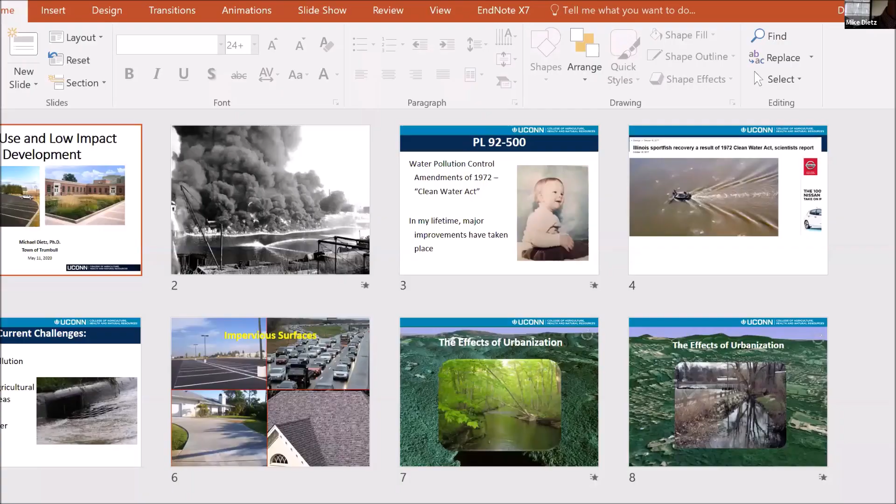So I'm going to go ahead and share my screen then. Does that look okay? Everybody see the first slide? Yes? Okay, all right. So I'm going to start out with a bit of background information.

Forgive me if you already know a lot about stormwater, I just need to make sure everybody's on the same page with a few slides on background stuff. Then I'll go through what low impact development practices are and some of the innovative things available for you guys to use in your town.

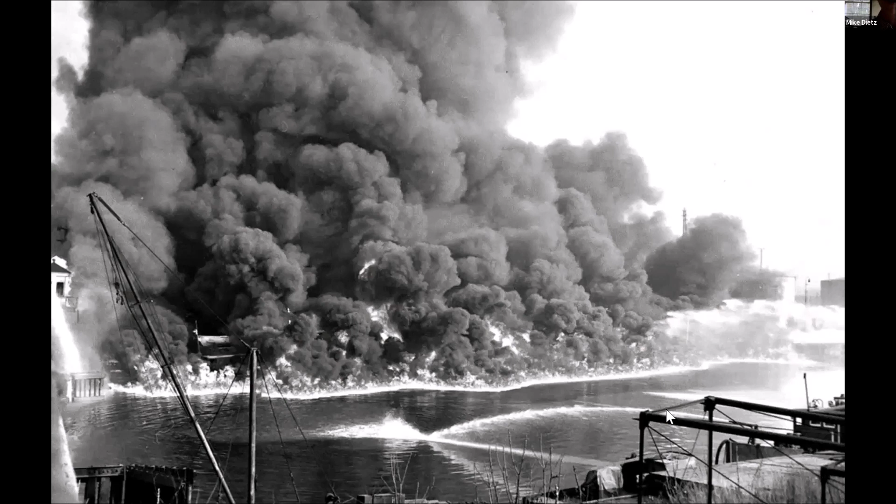And then of course we have one of the many fires that happened on the Cuyahoga River, but the one that captured national attention was this one here. These were events that really catalyzed and coalesced people around the environmental movement and forced our legislators and everyone paying attention to really do something about it.

So what happened as a result of that was PL 92-500. As many of you may be aware, that's also known as the Clean Water Act, but its formal name is the Water Pollution Control Amendments of 1972.

So 1972 happens to be a very good year, that's when I was born. So there I am there, and you can see by looking at me in my little frame here that I obviously had more hair in that picture than I have now. So some bad things have happened over the course of this lifetime.

But as far as water is concerned, major improvements have taken place in our country and certainly in Connecticut as a result of the Clean Water Act. And just as an aside, that act, the Clean Water Act, and the Clean Air Act were proposed and initiated under a Republican administration, but passed with strong bipartisan support because there were so many people, such a grassroots effort, that wanted this. So it's really hard to imagine this bipartisan effort making something positive happen for everyone, but that's really the way it was.

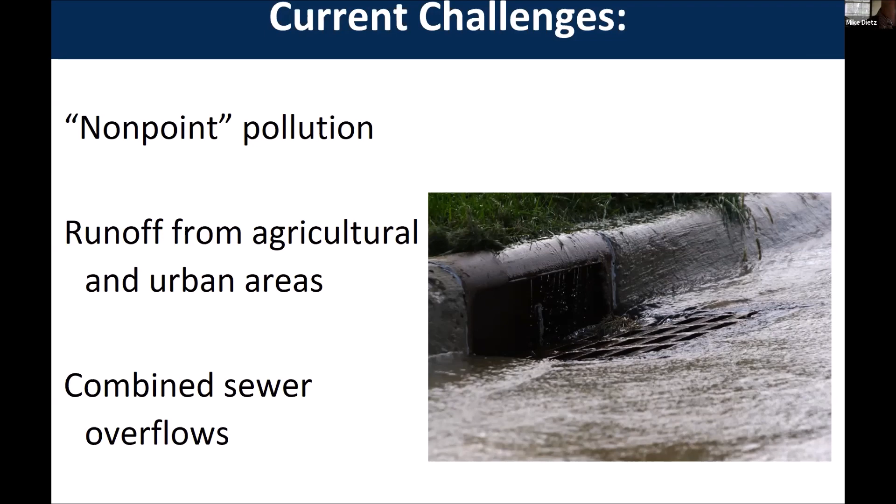What we're dealing with now is what we call non-point pollution, runoff from diffuse sources from agricultural and urban areas. I'm only going to be focusing on the urban stuff tonight, but agricultural runoff is also a form of non-point pollution. Combined sewer overflows also factor into this because there's an input from the stormwater system that causes those overflows. I'm not going to talk too much about those tonight, although I can answer questions about them if anybody has a question on those.

What's really driving these issues we're faced with now with non-point pollution are impervious surfaces—parking lots, roadways, driveways, rooftops, anything water cannot pass through. I'll give you a little progression here.

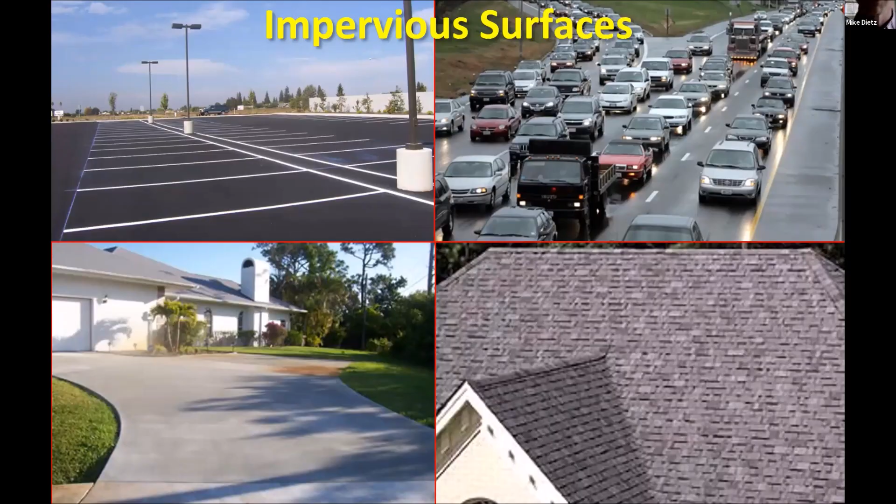This is just a representation of an undeveloped watershed. Not far from Trumbull, if you go up into the hills a bit, you can get into some very pretty areas with no houses, some nice state forest, tracts of undeveloped land. A stream that drains a watershed like that would likely look something like this.

We have lots of good cover over that stream, good forests, trees holding that bank intact, so it really is resilient to flooding. The trees shade that river to keep the temperature lower, so the native species that would be surviving here can still survive. And there's nice pool and riffle structure if you like to go fishing, especially trout fishing—that's nice habitat for trout.

Next we go one tick up the scale of urbanization. So we have some subdivisions, a few roads. A watershed like this might have a river that drains it that looks something like this—a little bit different. We can see this parking lot very close to the banks of the river, and this armoring of the banks, these stones installed here, because we've started to see some changes take place in the hydrology due to all that impervious surface in the watershed.

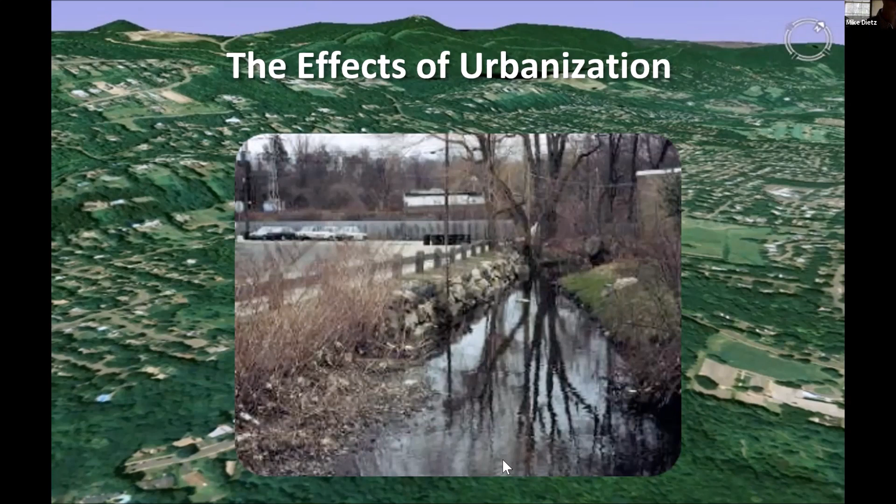We don't have as much cover over that stream keeping it cool in the summer, so it warms up quicker. These are just a few of the things you can see here, and the shape of the stream tends to get more channelized and straightened as well. So a little more developed.

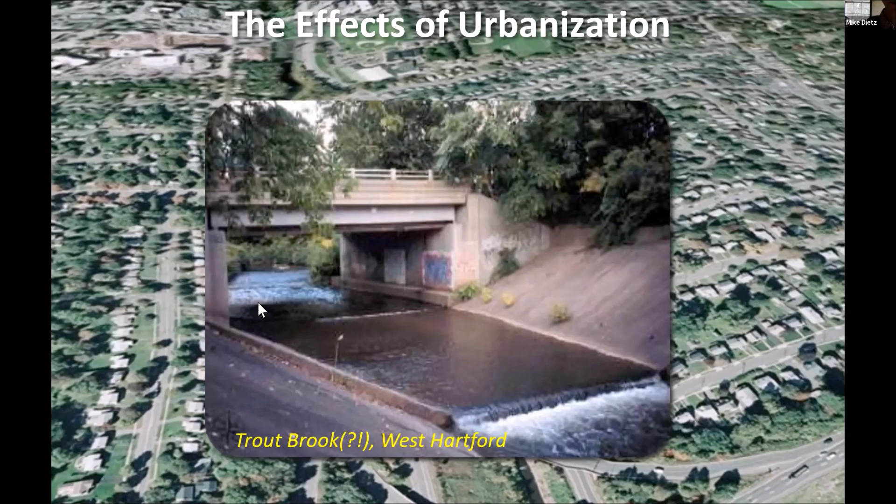This particular one is from West Hartford. If you ever venture up that way and see the exit off Route 84 for Trout Brook Drive, and look at the concrete-lined channel here, if you like to fish for trout, you probably know there aren't going to be too many trout in Trout Brook these days. When we see all this armoring of the channels, you're losing all the habitat for the aquatic life, and it's really not very supportive at all.

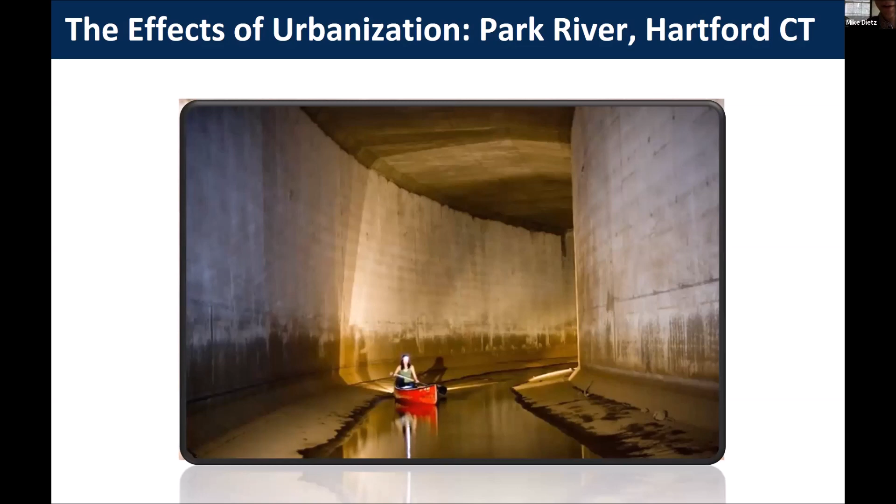That was when the Park River was put underground because of major flooding that happened in the 1950s and earlier that devastated the city. So they channelized the Park River and put it in a conduit underneath the city, and this is what the Park River goes through today. Really no opportunity for aquatic life to survive down in those kinds of conditions, as you would imagine.

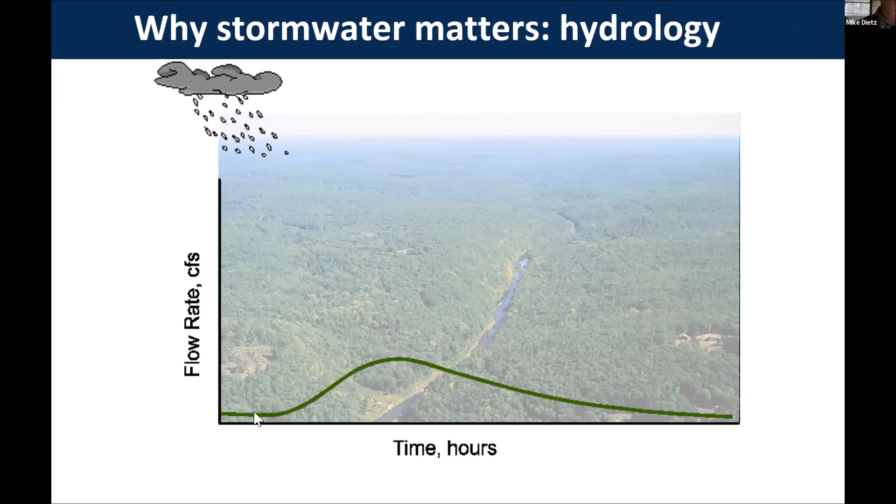So if we have a rainfall event happen on that undeveloped watershed, we might see a response that looks something like this. So we have this base flow level in the stream. You see a gradual climb up, a slow tailing off of that flow rate in that stream. For that very same rainfall event on a watershed that has a lot of development in it, like this one that you're seeing here, we would see a very different response in that stream.

So we would see much more runoff and a higher peak rate of runoff. So there's more volume coming out and it's coming off faster and it's getting there quicker. All right, so the timing of it has shifted too. So major changes to the hydrology, and this also drives changes in the quality of those waters too.

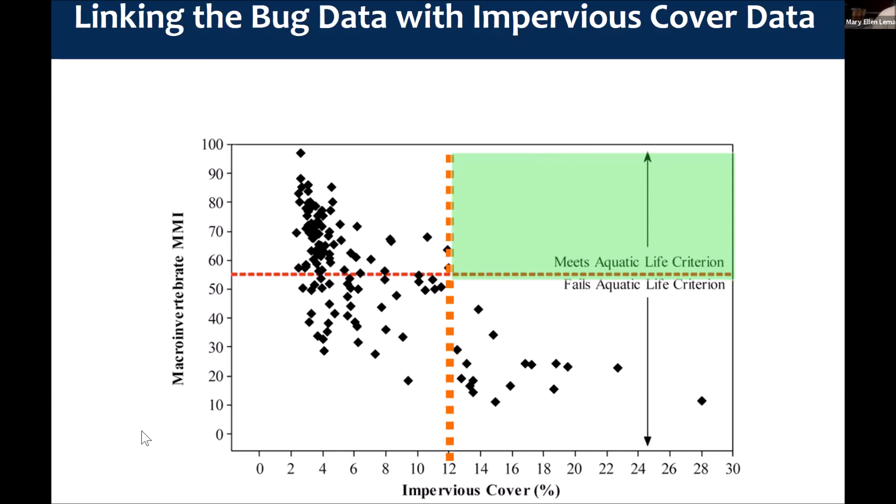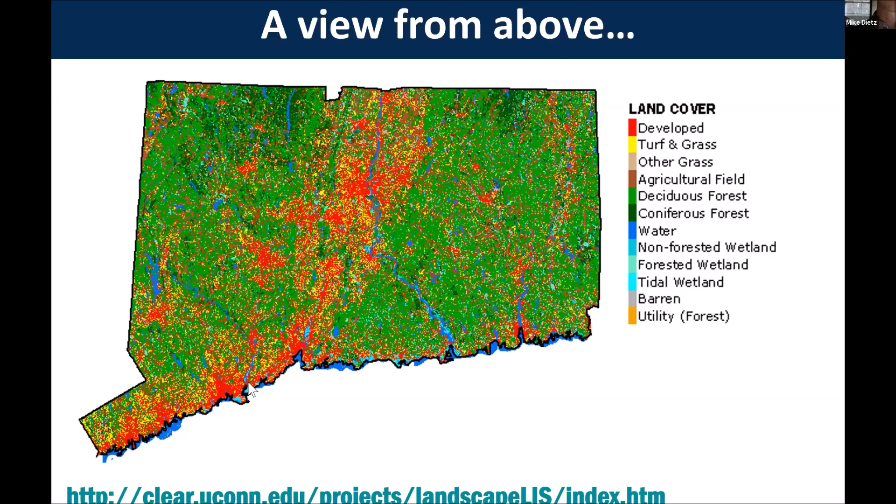But what this represents, the red pixels that you can see here are developed lands. So for each pixel, the software makes a decision as to whether it should be classified as developed or deciduous forest or evergreen forest. The green pixels are the forest classes, as you can see. But you kind of get the idea where our development is in the state. So around the center here, we've got Hartford and East Hartford. Down along the coast, we can see New Haven. Further down southwest, you can see the Bridgeport cluster here, and you guys are obviously just north of that.

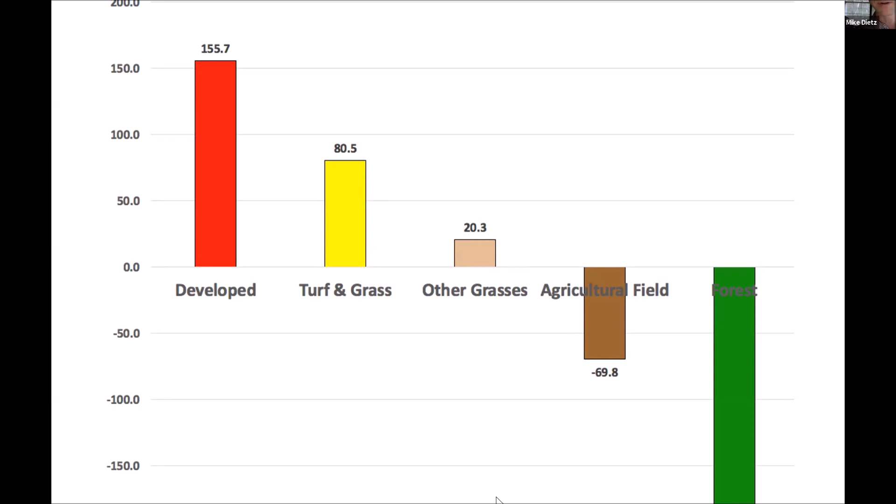So where did it come from? These things have to be at the expense of something else. So we lost agricultural fields, about 70 square miles, and 180 square miles of forest, the green one here. So you can see how this shook out over a 30-year period across the state. Pretty scary. If we compress all that development into one corner of the state, it would fill up Litchfield County, and turf and grass would fill up Middlesex County. So quite a large area when you look at it across the state.

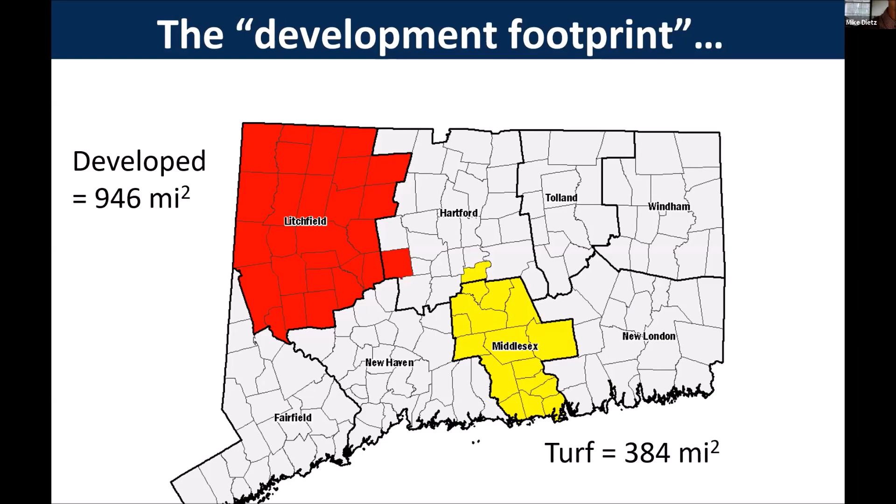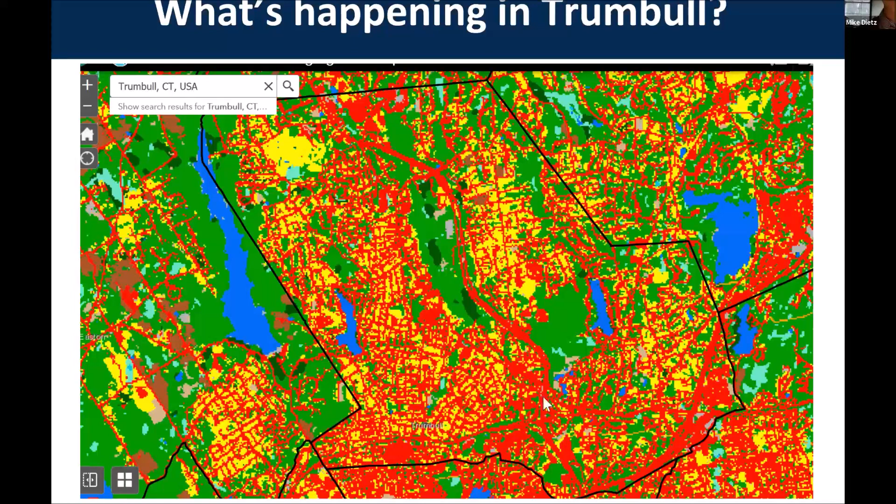So this is what's called Connecticut's Changing Landscape. So you can zoom in on your town and click on it and get some information about it. So this is just that image of 2015 of your town. So you can see some forest pixels here, the greens, but you guys have a fair amount of developed areas and turf and grass in there. Okay, so that's just a visual representation of it.

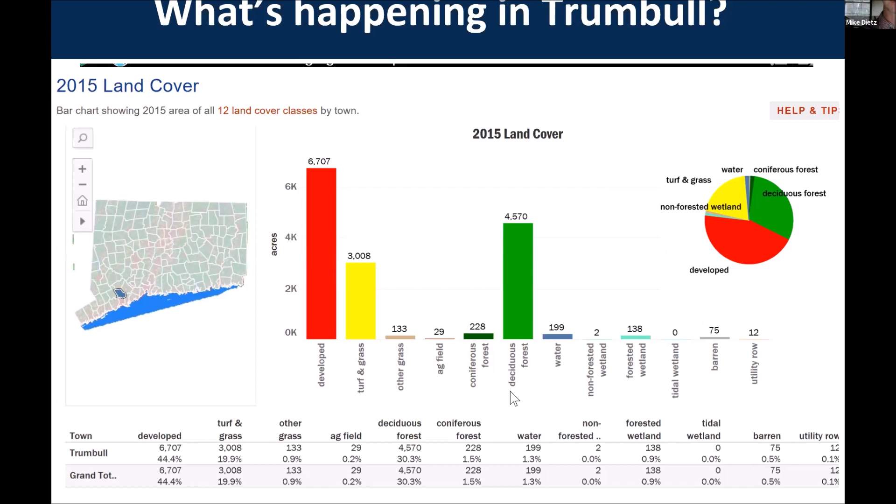All right, so 44% impervious or developed land is a really high percent. As far as averages across the state, that's one of the more developed towns that we see. And then if you look at what changed in the town from 85 to 2015, here's how it shook out for you all. So the numbers are small. Again, I'm not going to force you to look at those numbers in the table down there. I just put that for your reference.

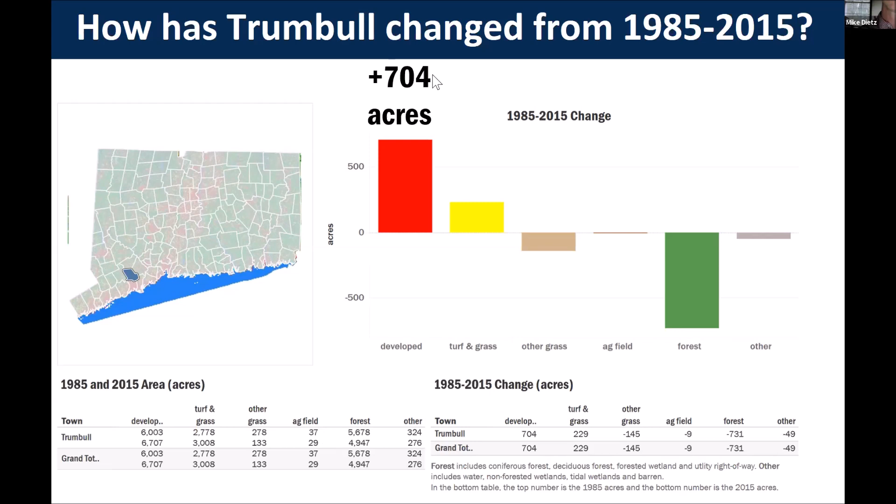But what happened here, you added 704 acres of developed land. You added 229 acres of turf and grass. And you lost 145 acres of other grass. And you lost 731 acres of forest land. All right, so you can kind of see how it all adds up and subtracts out over the course of time. So that's a decent amount of impervious land, developed land, added in a 30-year period. So maybe I'll just pause there for a second and see if anybody has any questions about that before I move on.

Is that surprising? I'm sure that just like other parts of the state, the past few years since the recession, we didn't see a ton of growth. So I would say since 2012 or 15, we probably haven't had a huge growth spurt in the state like we have in some parts of our past. But we all are well aware of the building booms that happened in the 1980s and 90s around here. Good. So if there are no questions.

I have a question. Yeah, sure. Go ahead, Marshall. Okay. We are a fully developed town. There's virtually no undeveloped land. We're at a tear down and rebuild stage. Gotcha. And I know as I've sat through zoning hearings and things, we're looking for changes so that what's being done will take the groundwater, not have runoff, to take care of those changes. So looking at really what happened until 2008, where we reached fully developed, I don't get as nervous because we don't have the acreage to lose anymore.

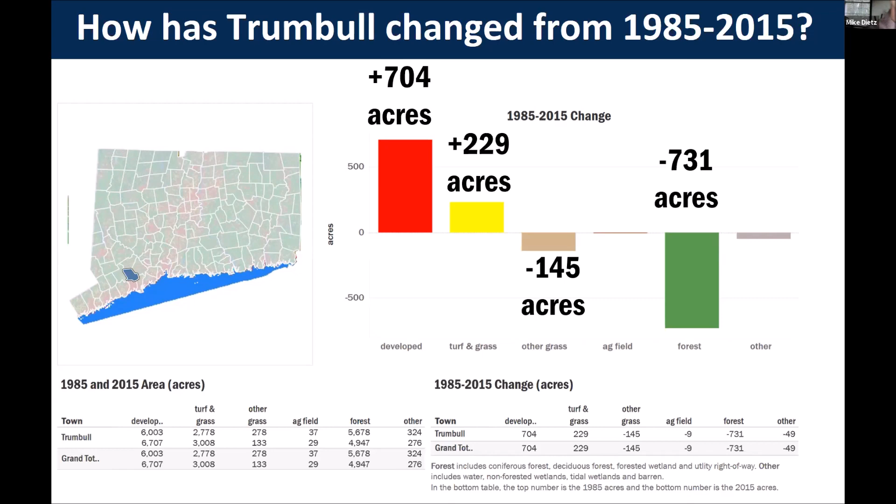All right. So this is just the last little piece here about really the magnitude of this issue. So I come from a blue collar family. My uncle is still in the construction business. So as you can imagine, with me as a water guy talking about this stuff, sitting around our holiday dinner tables, the conversations can get quite lively. So my uncle always tells me, what are you worried about? It's not that big of a deal. It's just rainwater. Why do you make such a big deal out of it?

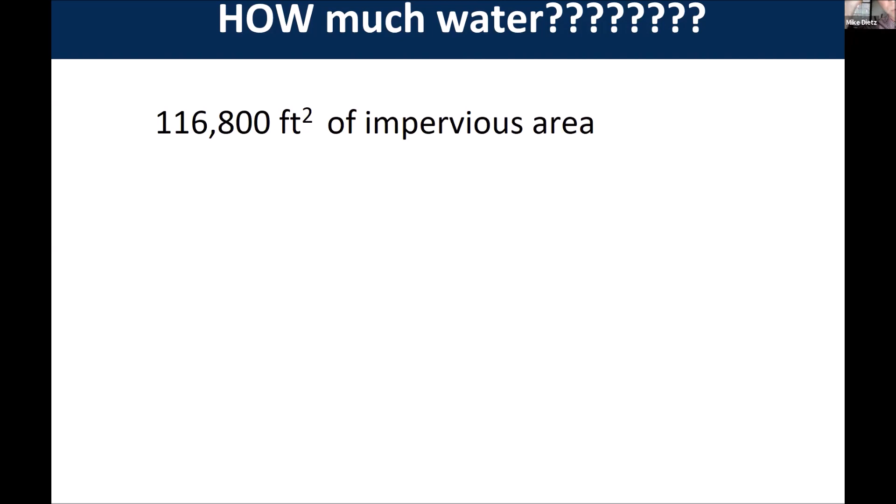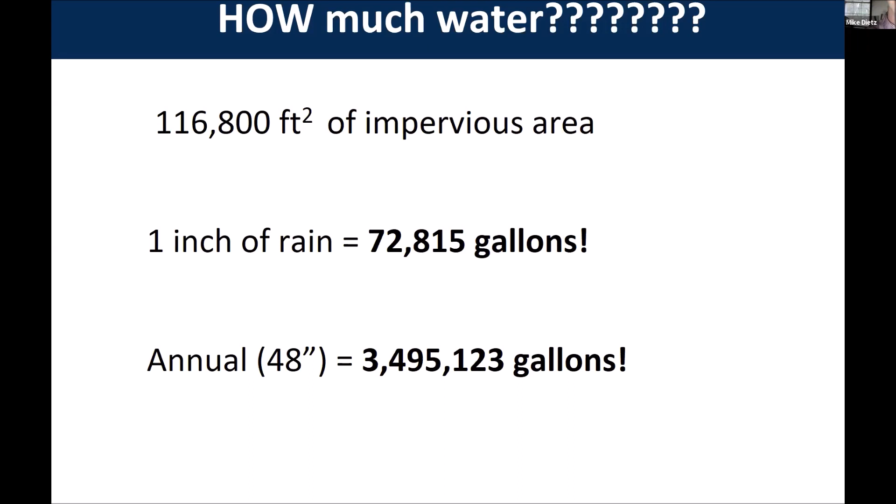If we get an inch of rain, 72,000 gallons of water are gonna run off that site. 1 inch of rain. You think about how often we get an inch of rain. It's pretty common around here, right? That's an unbelievable amount of water that has to come off that site, and it has to go somewhere. In an average year, we get about 48 inches of rain, 3.5 million gallons off of 2 small buildings and a parking lot.

So now I know, as you said, you are a developed town, but go to Bridgeport, go to New York City and multiply those numbers that I just gave you from that one tiny little site. And you'll see just for a simple 1-inch rainstorm, the billions and billions of gallons of water that have to run off and go somewhere. Now you can understand the magnitude of that problem. So it really is a big deal when you add it all together.

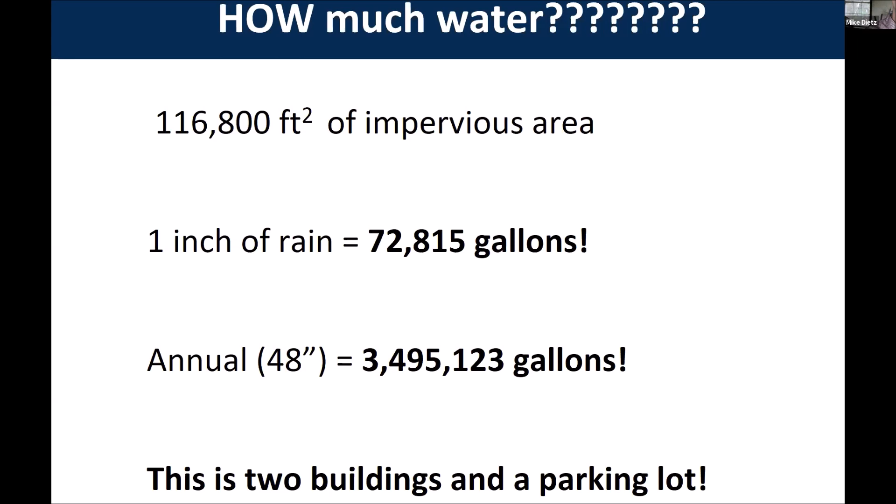So now we'll go into what we can do about it. I'll talk about low impact development and site planning here. This is also called green stormwater infrastructure, but the term low impact development or LID started in the 1990s from the state of Maryland. They were dealing with issues with the Chesapeake Bay. So all of the goals of low impact development really center around that hydrology that I've talked to you about, trying to preserve the hydrology of that site before it was developed. That's the bottom line here. All right, so all those things that go into that are what we're trying to focus on.

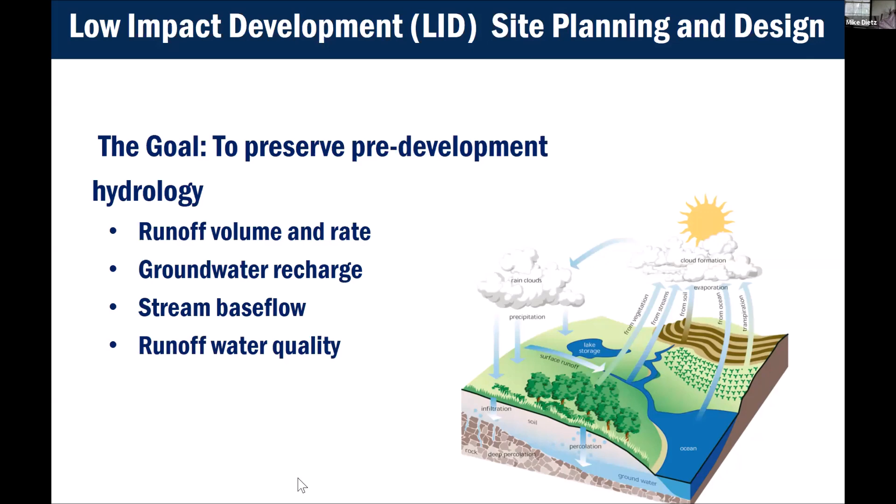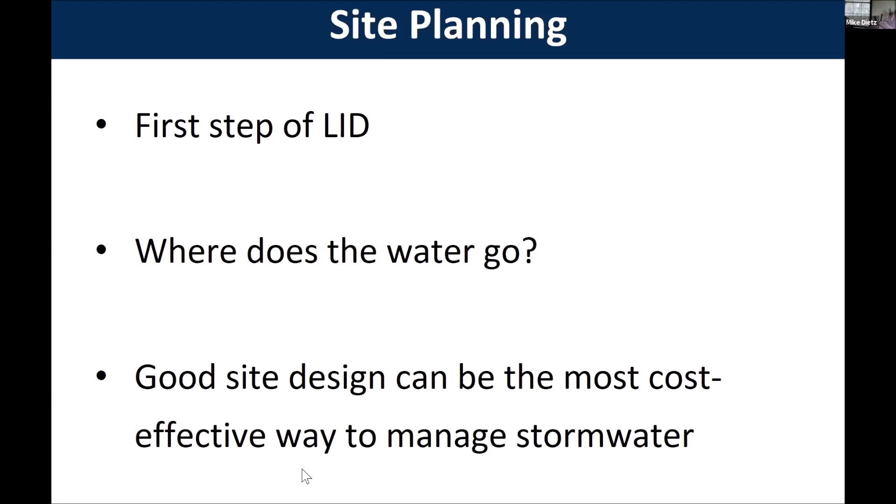The planning of that site before any development even occurs, and again, I understand you guys aren't in this phase right now, but even with a redevelopment, proper site planning can really go a long way. So just asking, where's the water currently going? Is there a way we can take advantage of the natural system, natural movements of the water that are taking place? Instead of having high cost things to put in, can we design it in such a way that it manages water on site?

So this is just one very small example from my colleague's driveway. He has a house in Glastonbury. He needed to repave his driveway. He wanted to put in some pervious pavers, which I'll tell you about in a few minutes. But when we looked at his driveway, we realized that it wasn't draining to the road. It was actually graded off to the side, and the runoff went into the woods. So this driveway was not connected into that stormwater system, and therefore was not really causing problems downstream. He was managing it all right on his lot.

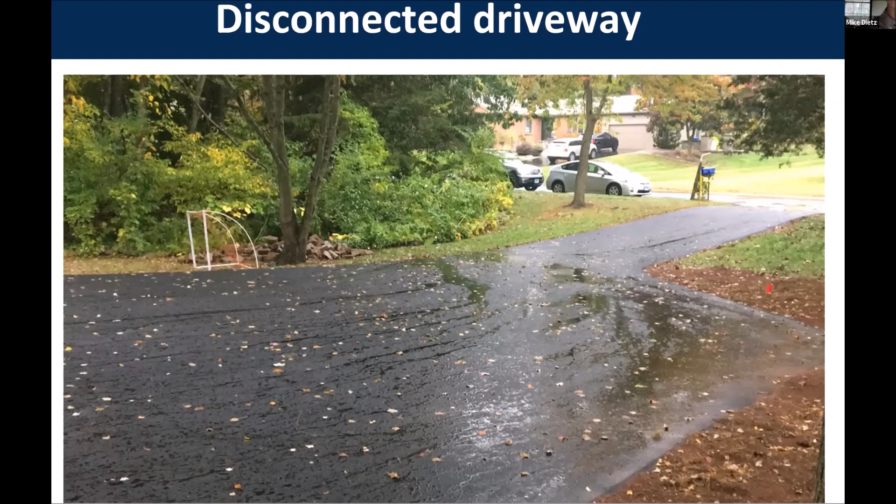So this site design, and again, every site is different, but sometimes you do have the ability to make a small change in where water is directed, and that can save a lot of money in the long run. So the practices that we'll go through here: bioretention or rain gardens, pervious pavements, green roofs, and rainwater harvesting.

The gutter downspouts come down the side of the house. They're angled through the foundation and they go into the sewer line inside of the house. So the roof of that entire building is fed directly into the sewer system and is part of that combined sewer problem that we have in Hartford and many of our other big cities. So a very simple disconnection of that pipe and directing that water out into the front yard made a tangible difference here at this house. And no, this didn't solve Hartford's water quality problems, one house, but you add all those houses together and look at the potential disconnects that you could do, and then it really starts to add up.

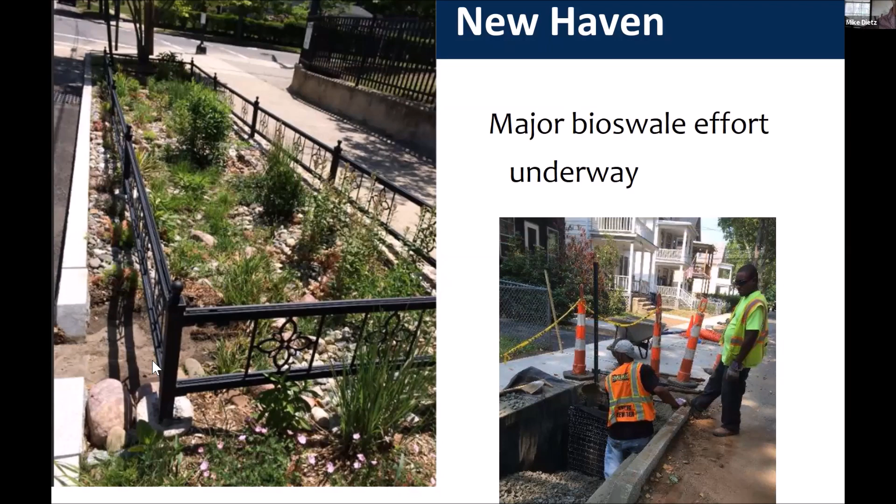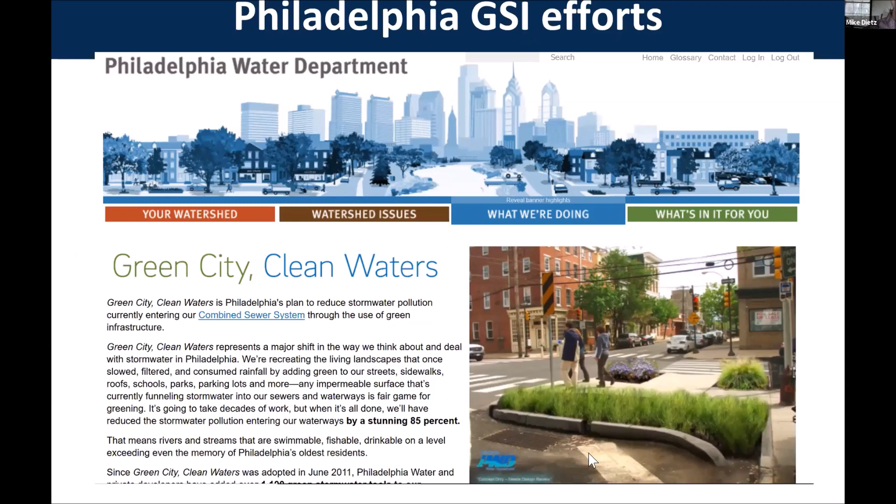Here's another example of Philadelphia, another heavily developed city. They have major issues with combined sewer overflows. They have a big effort underway to handle stormwater, to keep as much of that stormwater as possible out of the system to avoid that problem in the first place.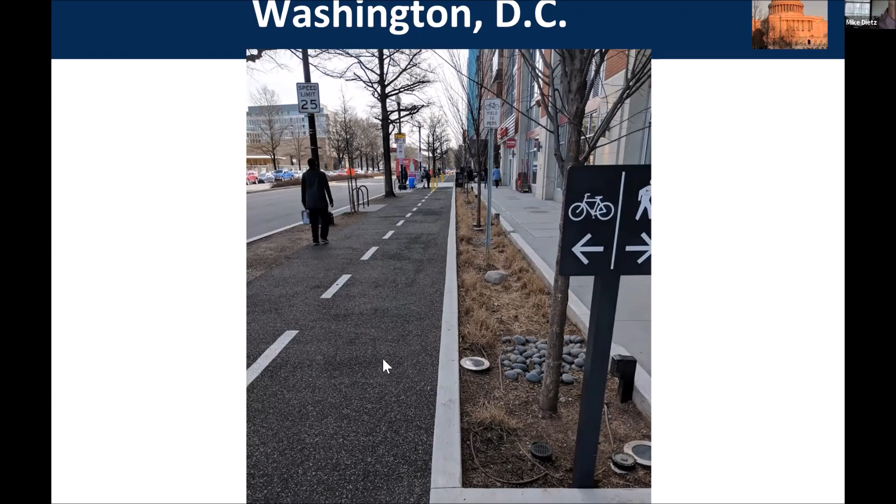Maybe I didn't explain this well enough when I first introduced rain gardens, but the goal here is to get that water into the ground, very close to where it's generated. So taking water either off the roof of the building or off of the sidewalk or even off of the road, as you saw in New Haven, getting it down into the ground as it did before that site was developed. That's the key.

The plants that go into these, I'm not going to go into detail on them, but we have a list for Connecticut that we've put together. We also have lists for other states. We've expanded this; I'll talk more about that in a minute. These are plants that can tolerate wet conditions sometimes, but can also tolerate dry conditions at other times, ones that are native to this area around the outskirts of wetlands.

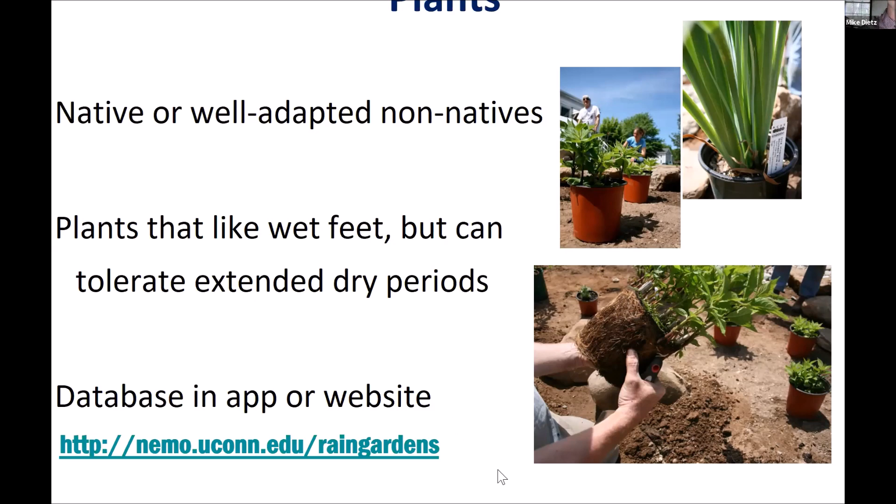And I'm a very practical, hands-on guy. I'm not going to try to tell you that all these things are a silver bullet. You just put these in and they fix all your problems and pay your kids' college tuition and everything else. This is reality, and everything needs to be maintained. It's just different maintenance.

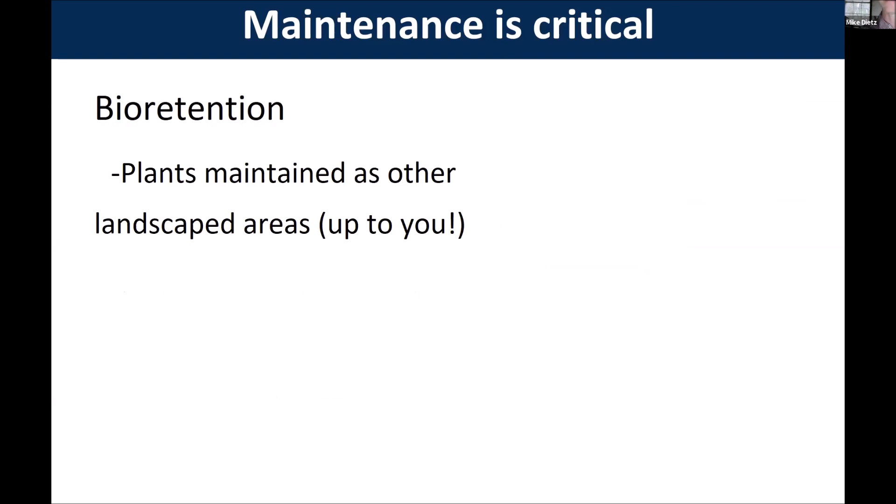So for bioretention, the plants can be maintained as other landscaped areas. It's really up to you how you do that. You need to watch for erosion, just to make sure that it's not cutting out any soil anywhere. But the most important thing is to make sure that water can still get into it and it has the storage that it was designed to hold, all right?

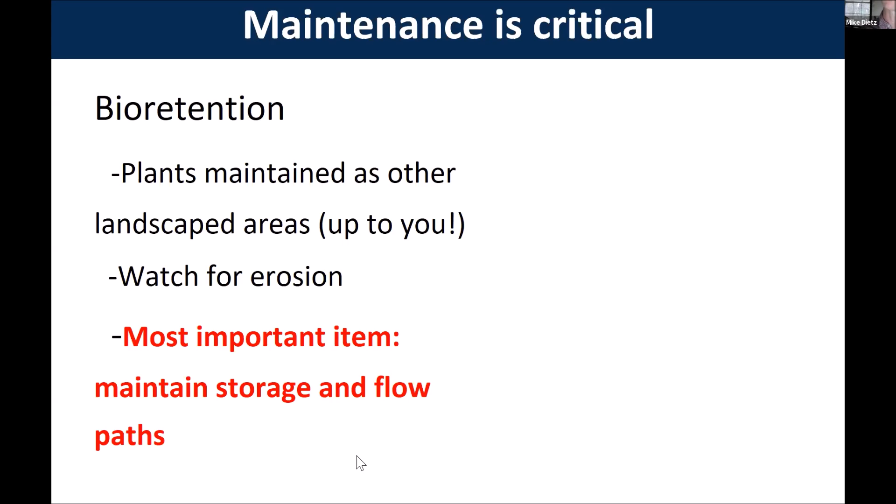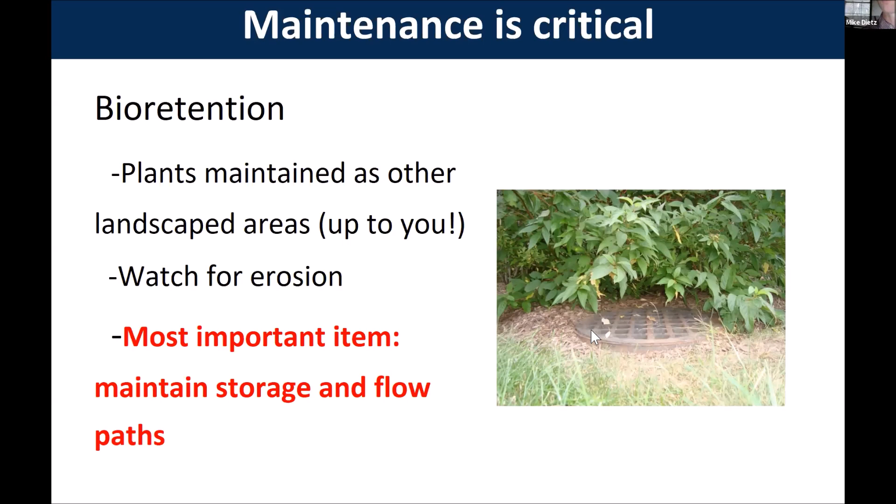So this is one issue we've had up at UConn where we had too much mulch being put in a bunch of rain gardens, so they were essentially filled up to the overflow point. We've lost all the storage in there. So you can burn that image out of your mind right now. I'll help you with this red X. This is not what we want to do for rain gardens. You want to make sure you've still got the storage that was designed there.

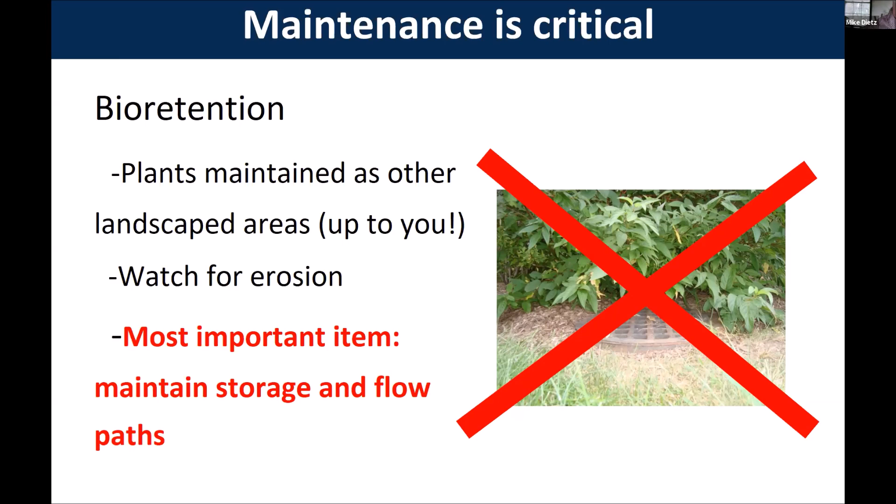Well, looks like I have a pretty good thunderstorm rolling through here right now. So hopefully I will stay online with everyone. Just wanted to let you know, just in case something happens, that's what's going on.

We did have some visitors in ours, the ones we have up at UConn. A woodchuck took up residence in mine. I'm not sure how he fared in the next flood that came, but you never know.

This is just a variation on that theme. This is Victor Benni from the town of East Lyme. He basically built his own prefab box here and saved a lot of money. So they're making these in town, installing them wherever they can. Same idea, just getting that water down into the ground before it leaves the site.

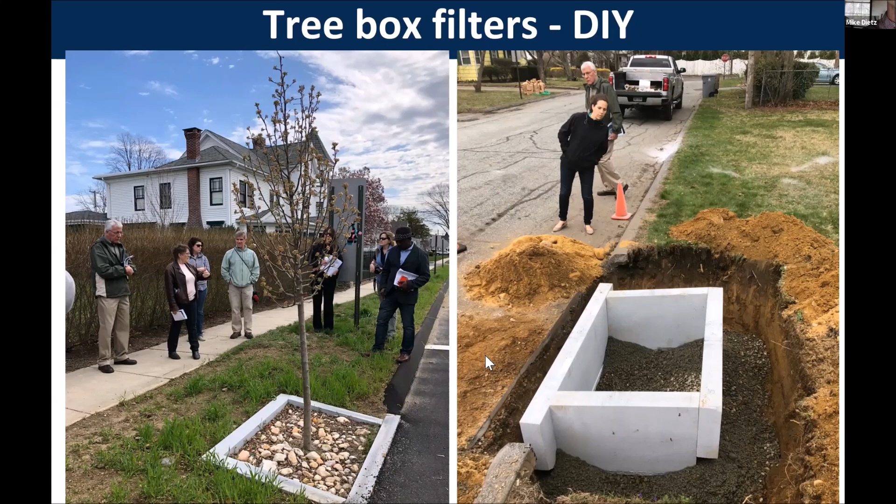Green roofs are another nice tool. These are especially nice in really developed areas where you've got a lot of rooftops. Our big cities — Chicago used to be the nation's leader with over 1 million square feet. New York City is rapidly taking over as a leader in the country. Europe has a lot of these too; they've been far ahead of us in implementing green roofs.

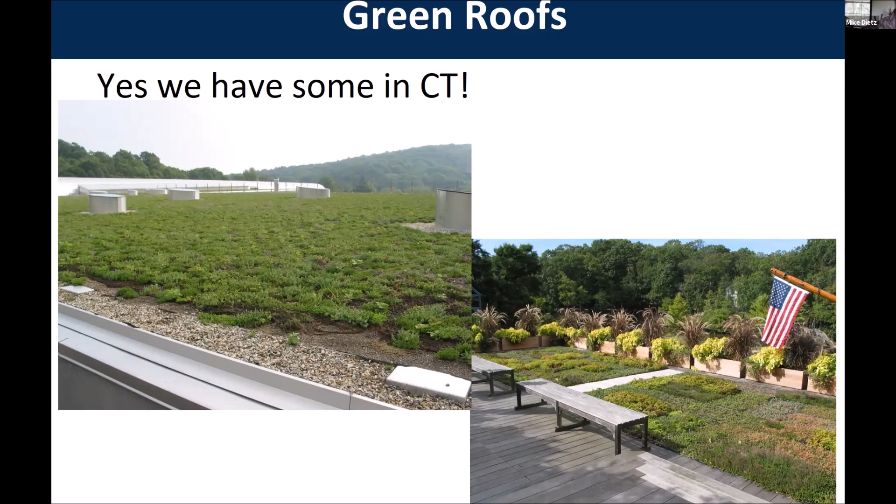This is a very thin media, not a thick, heavy soil layer — that's the older style. This is a thin, maybe 4 to 5 inch thick layer of expanded shale and other minerals that allows low plants like sedums to do well up there. But you're not going to grow big trees in a situation like that. The media is nice and light, which makes it suitable for buildings that don't have huge concrete floors for structural support. So we do have some of these in Connecticut.

We've got quite a few up at UConn. They provide a nice energy benefit too, not just the stormwater benefit. These will capture and release about 50% of the rainfall that falls on them over the course of the year. There's research that was done on this right here at UConn, but they also do have that energy benefit as well — reduce heating and cooling costs.

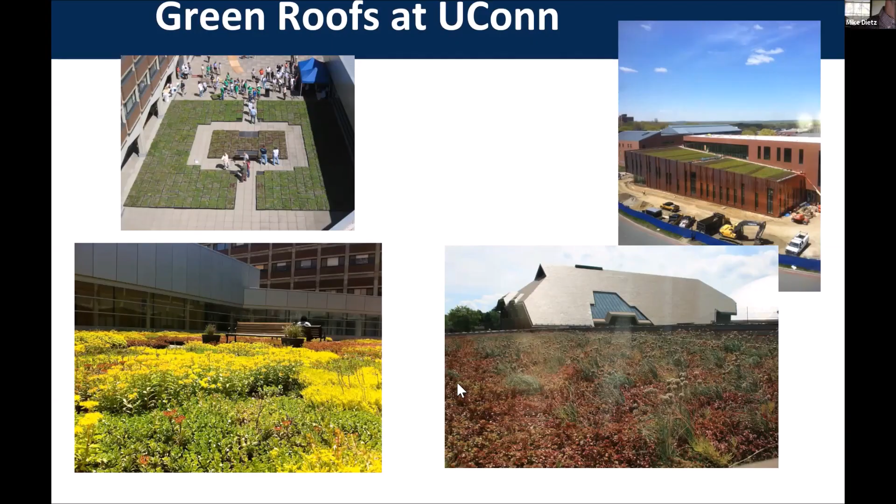They can also be utilized as nice space. This rooftop, if it were a traditional black EPDM rubber roof, nobody would want to be sitting out there in the summertime — you would roast out there, it would not be pleasant at all. But now this makes nice habitat for students, for example. This is at Aetna in Hartford, just a nice example there.

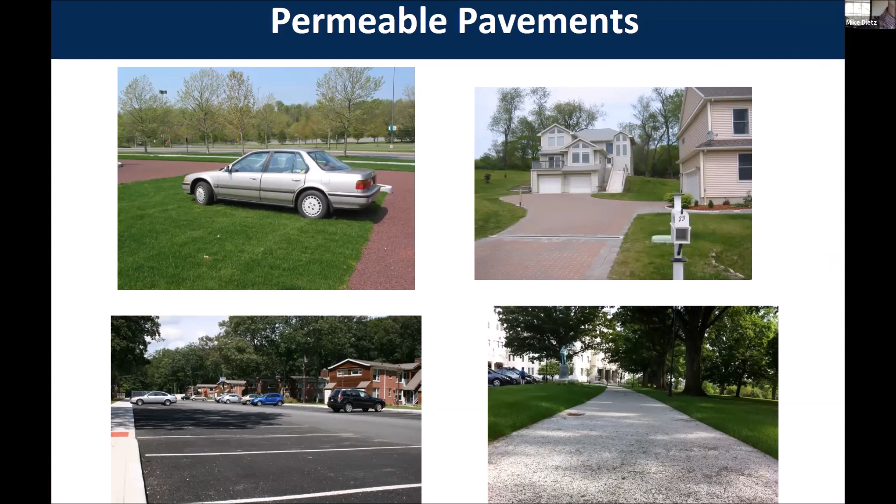There are also several nice alternatives to traditional concrete and asphalt for our pavement surfaces. I'm going to go through a few of these in detail. The one thing they all have in common is that the top layer will vary — I just show this porous asphalt as the top layer here, but really any of the pavements I'm going to show you, you could just substitute in that type for the top layer. What's below that top layer is really what's important.

We have this coarse stone base, usually about inch and a half crushed stone. Then there's a 2 to 3 inch choker course, also a smaller diameter crushed stone. This is what allows those pervious pavements to function and lets that water sink down into the native soil. Water can pass through that top pervious pavement layer, and then it gets down very quickly into the subgrade.

So if you tried to install the regular pervious pavement top course over regular processed gravel, which you would put under a parking lot, it's not going to work well, because that processed gravel has a lot of fine material in there.

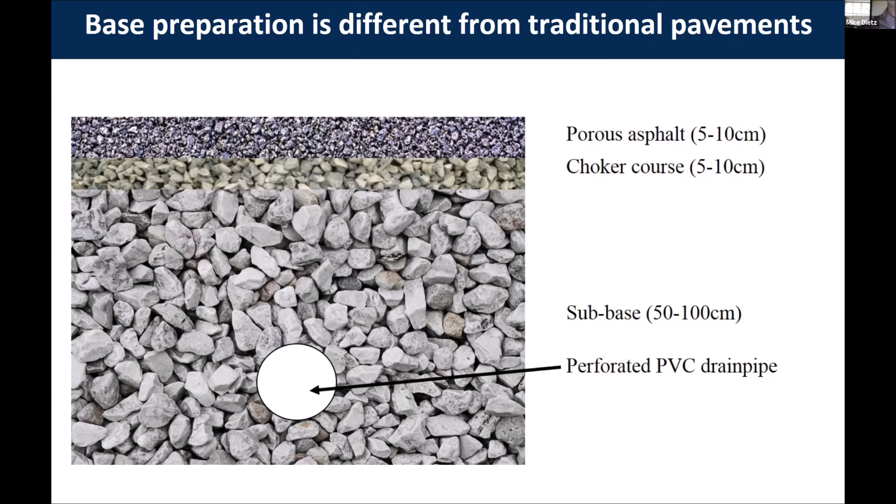When it gets packed down, it does not allow water to move through it very quickly. So that's a key difference that all these things have in common.

So this is the first type: permeable interlocking concrete pavers, or PICPs. These are very similar to traditional block pavers you may have seen on a patio or like cobblestone in big gathering areas, but they have spaces in between so that when you put them together, they get filled with small crushed stone and water can pass through. So these are just variations on the same theme.

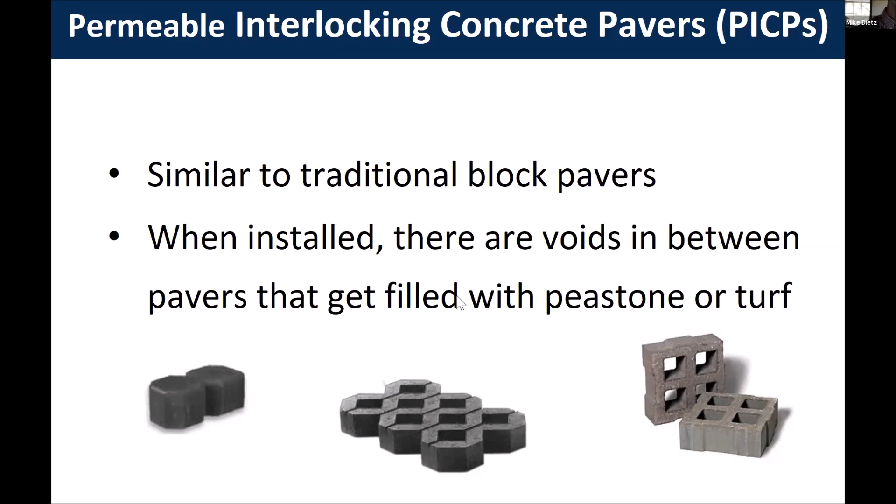Can I interject and ask a question, please? Yes, go ahead, Tony. Yeah, so Tony Silber from Inland Wetlands and Planning and Zoning. Two questions, and you might be getting to it. One, are there any towns in the state that require new development to have permeable surfaces? And two, is there a cost differential between traditional and permeable?

I'll answer your second one first. It depends on the type of paver. The paver blocks themselves, like these blocks you see in this picture, are the same price as regular paver blocks you might put down on a patio. But to have somebody install that on a sidewalk or a large area, it's going to be more expensive than regular concrete—it's manual work. They have some automated methods now, but it's labor intensive. If you're talking about materials like permeable asphalt or permeable concrete, that material cost is about 50% more. This was about two years ago, so I'd imagine it's come down even more, but let's assume it's about 50% more for the material.

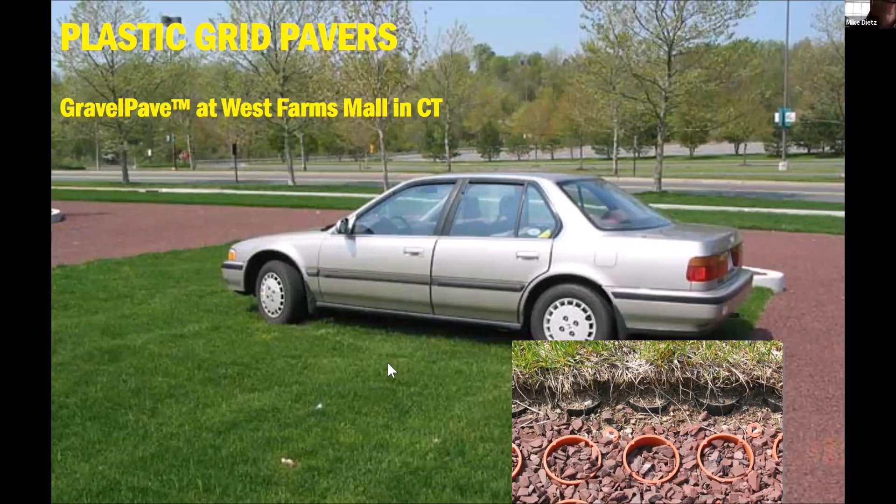The grass can do okay in there in a low traffic area, but if you've got high traffic it kind of gets beat up with the vehicles on there. And the plastic ones are okay, again, in a low traffic area, but if you're high traffic and doing a lot of plowing in the winter, these can be a little problematic. This is another variation on that theme, just other proprietary products, same idea.

This is pervious asphalt. So this is a variation on the mix that leaves the sand out of the mix. It's just the aggregate material and an asphalt binder that holds it together, so it maintains some of that porosity and allows the water to pass directly through that pavement.

The nice thing about this is it goes down with the same equipment as regular asphalt, so that's a huge plus - the guys can use the exact same equipment. Tilcon, one of the biggest pavement companies in the state, put a couple of our lots in up at UConn, so they're very knowledgeable about how to do this. They've got the mix dialed in pretty nicely these days, so it's a pretty easy product to get now, where it was not before.

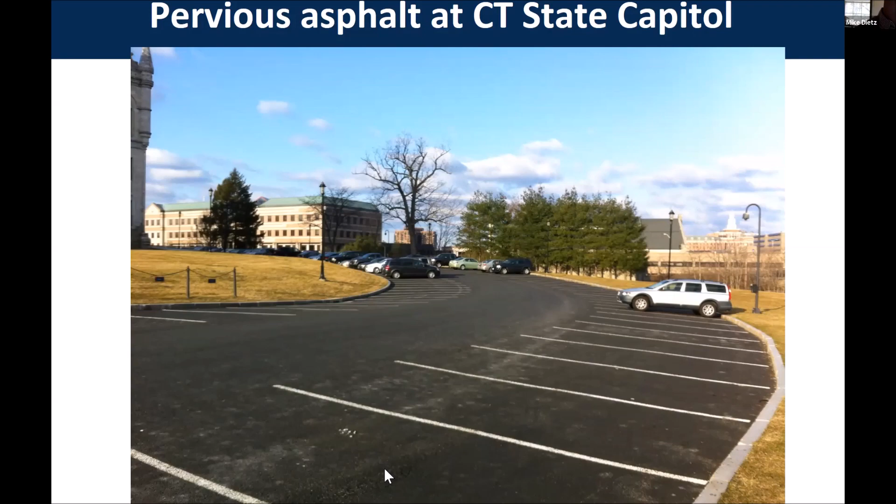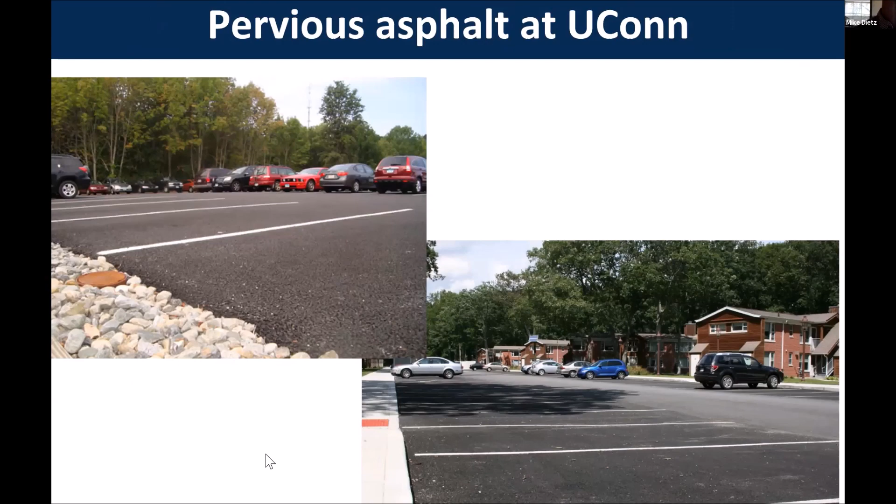Pervious concrete is also an option. Just like the asphalt leaves the sand out of the mix, same thing for this. So if you've mixed up concrete before, you know it's some sort of stone aggregate, Portland cement, sand and water. This leaves the sand out of the mix, so it's just Portland cement, water, and aggregate, but it's a very specific ratio.

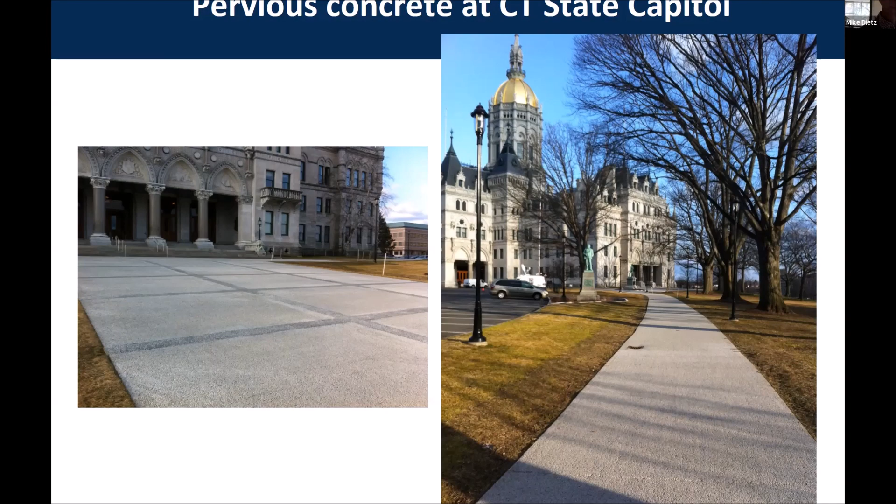So the National Ready Mixed Concrete Association maintains a list of certified pervious concrete installers that you can refer to if you'd like to find someone in our area or in your area, because of issues - we've had a couple of failed projects when it did not go well.

This company up in Yarmouth, Maine started making precast pervious concrete sections. These are 5 feet by 8 feet. They build them in their facility, they have all the quality control, and they cure for enough time - that's another issue with pervious, it really needs to cure for a much longer time compared to regular concrete.

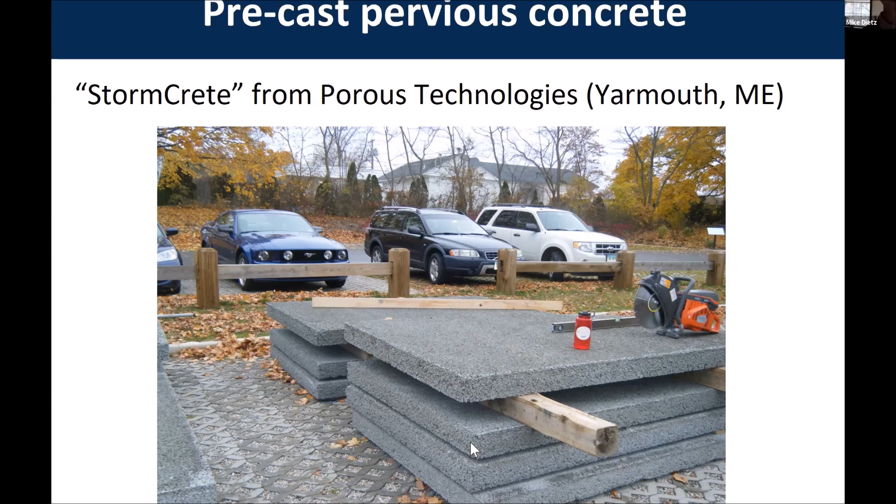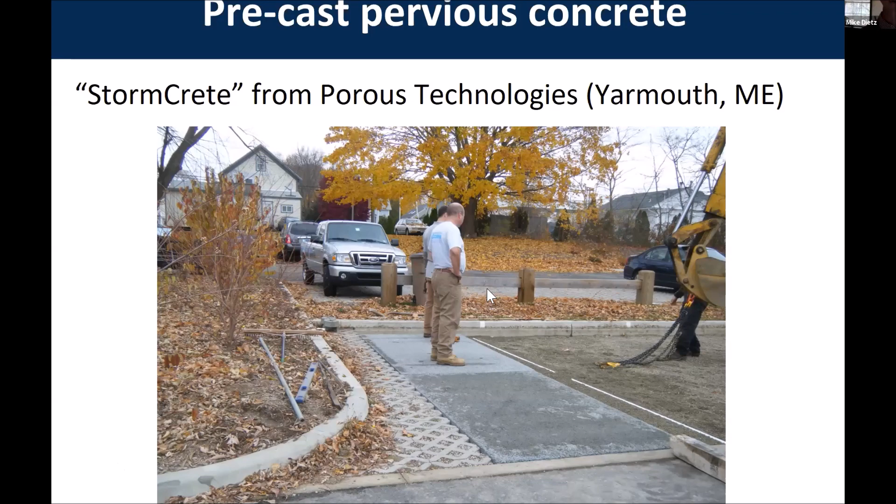So they make these in their facility and deliver to the site. You prepare your base - you can see this crushed stone down here - you drop it in place and you've got an instant parking area or sidewalk or whatever it may be. So we've installed a bunch of these up at UConn. Here's a lot where we replaced all the parking stalls with their precast slabs. It's been holding up extremely well - we're really happy with this product so far.

Just like with the bioretention, I'm not going to sugarcoat it. The pavement surface will hold up fine. That's one thing we've seen because of that base material: you don't have the frost heaving in the winter like you do with regular lots. We don't have cracking. We have a 10-year-old lot with pervious asphalt.

There's not a crack in it, not a frost heaving, 10 years old. That's unheard of. But if you neglect the maintenance and do not vacuum it out, you're not going to get the infiltration of water that you want to have.

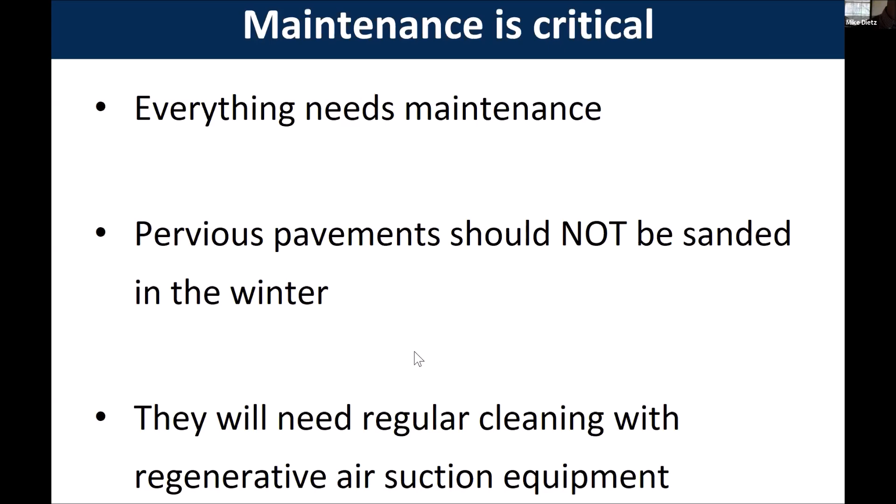First of all, you don't want to sand them in the winter. They can be salted. They don't actually need as much salt because that water, when it melts, has a place to go, so you don't have the refreezing like you do on regular asphalt. But you don't want to be sanding them at all. And the cleaning needs to be done - how often depends on how much sediment gets loaded onto it. A high traffic area will need it done more often. But it needs to be done with not just a regular street sweeper, but a regenerative air sweeper that can really suck out that material and get it out of the cracks and crevices.

Is there a special salt that's required? No, for the asphalt it doesn't matter. You can use the same regular salt, sodium chloride, magnesium chloride, any of those.

I had a very bad experience with my tenant putting lots of salt on the steps of this house. The porch fell apart, and doing a little research, you find out there's only certain salts that we should be using on concrete. Concrete, yes. But with asphalt, yes, I'm thinking of asphalt. With the asphalt it doesn't matter, but you're correct - with concrete you have to be careful, especially if it's fresh. If it's recently installed, it's more susceptible to the salt. Yeah, that's a good point.

I'm going to disagree with that maybe, but that's like the stuff you buy for cat's paws, that cat stuff. Yeah, I'm not sure. I know that up at UConn and many other places they have just been using the standard sodium chloride, and it's been holding up okay.

But yeah, I'm not sure which of those other products would be best. In general though, the best thing is just to use less of it, and that will definitely lessen the problems. You don't need as much for sure with these pervious products. But that's a very good point. Was it John that asked that? Yes, it's John, and I just had a bad experience with it. I had to replace an entire porch because my tenant over-salted it and I didn't realize it really. I went over one day and the stairs were melting away.

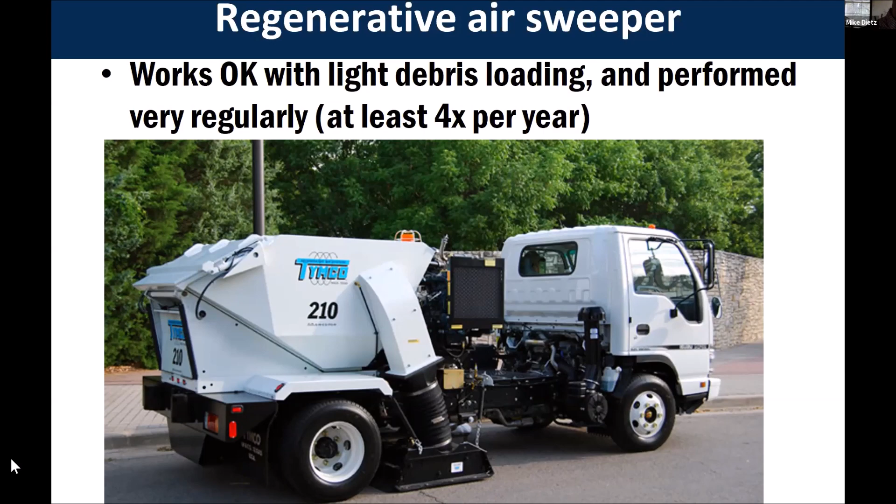So if you do neglect it, you need to bring out stronger equipment to maintain that. I'm not sure if it will play for you. I don't know if you can hear the sound or not, but the sound isn't too important. But these guys are coming in. This is high pressure water and high suction, cleaning it all out.

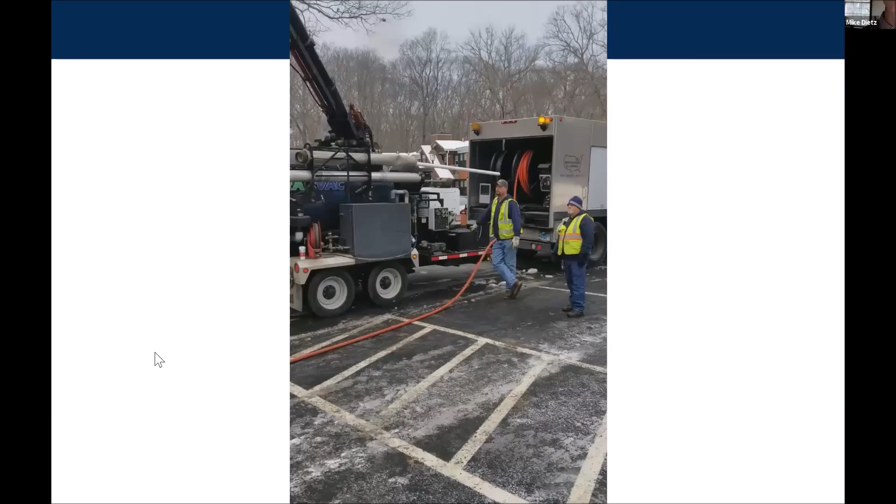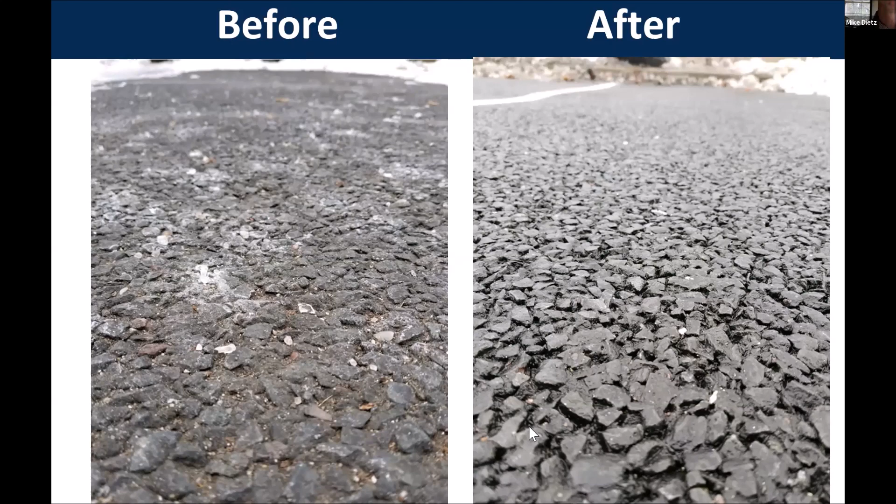And lastly here, rainwater harvesting. Again, this can be done on a very small scale on residential lots. Not going to make a huge difference, but every little bit counts. And in other areas, some of the big cities and even some of our universities around the country are utilizing some large cisterns to capture that water and reuse it for irrigation purposes. So it can be reused as a useful product.

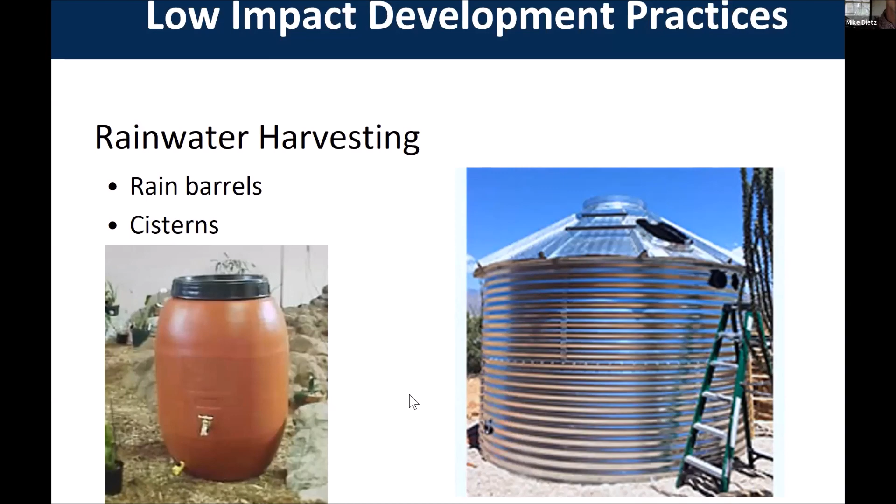I'll just show you a couple of our tools that we have available that can assist you in highlighting some of these things that I've talked about and seeing what's around your area and around the state. So first of all, we developed an app for rain gardens. We've been doing educational outreach on this stuff for quite a few years, but with the advent of the smartphone era, we decided to take this information online. We did have this for both platforms, iPhone and Android. Currently, the Android one is not working, but the iPhone version is still working right now.

Sorry, will there be an Android app? Will it be working in the future? I'm hoping so, because I'm the lone Android guy in my office. So I've been pushing hard to get this back up and running. We do have somebody working on it now. If you check back with me, I'll give you an update in a couple of weeks. Okay, is there a PC version or an online version as well? Yes, and I will show you that on the next slide. Okay, thank you. Yep.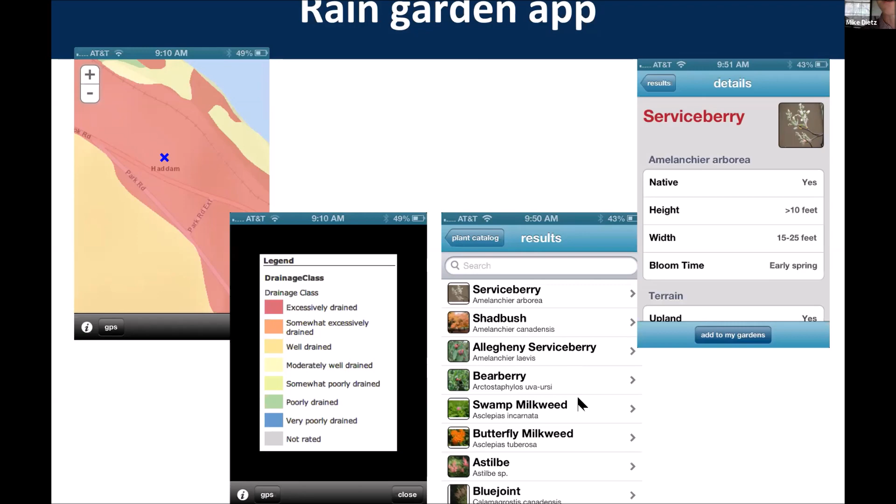And it also has a plant database in there. So all these plants that I mentioned before that are good for this area are in here. You can click on them for more information, sort by bloom color, by shade, sun, that sort of thing too. So here's that website. All that same information that's in the app is available on the website, nemo.uconn.edu/raingardens.

So the other thing you can use, this is something we started here in Connecticut, and then we expanded and offered it up to all of our partners around the country. We have thousands of entries in here now. This is a low impact development atlas. People have entered in where they've installed rain gardens or permeable pavements, that sort of thing. And you can zoom into your town, your area, and see what's installed near you. So it's lidmap.uconn.edu. This is accessible just through the regular website if you go to it on a PC.

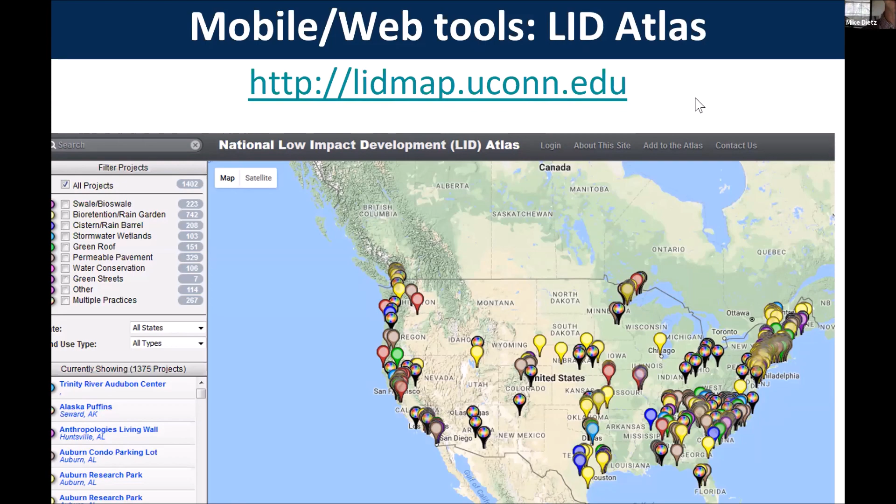And if you look at it on a cell phone, it automatically will adjust. The mobile version is quite slick. So you can see what's nearby you. Click on the little balloon and you can see some information about it, a picture and a description. And you can actually add your own practice to it. So if you have something in your town that you know should be on there and is not, you can add it. You can log in using a Google login and add that information. It's pretty cool.

And as I mentioned before, the new MS4 rules are out there. For those of you who are involved, you may have felt like this for the first couple of years of this, but we've been funded by the state to actually do outreach on this. So you may have heard of Amanda Ryan doing some outreach on this.

We have a great website, nemo.uconn.edu/MS4. This is organized around those 6 minimum control measures. So if you're involved with the MS4 stuff, you know exactly what I'm talking about here. If you're not, this probably sounds like Greek to you, but just trust me that those of you in the town who are involved with it, everything you need to know about is in here. So lots of templates in here, mapping tools, tutorials, and other great things that can really help you through this.

And as I mentioned before, this is where LID does come into play with those regulations. So towns are now required to put into their regulations that people that are bringing stuff to their boards, that they require consideration of low impact development first. So they have to justify why they couldn't use it. You have to reduce or eliminate barriers to LID in the regulations. And you have to retain the water quality volume on site for new and redevelopments.

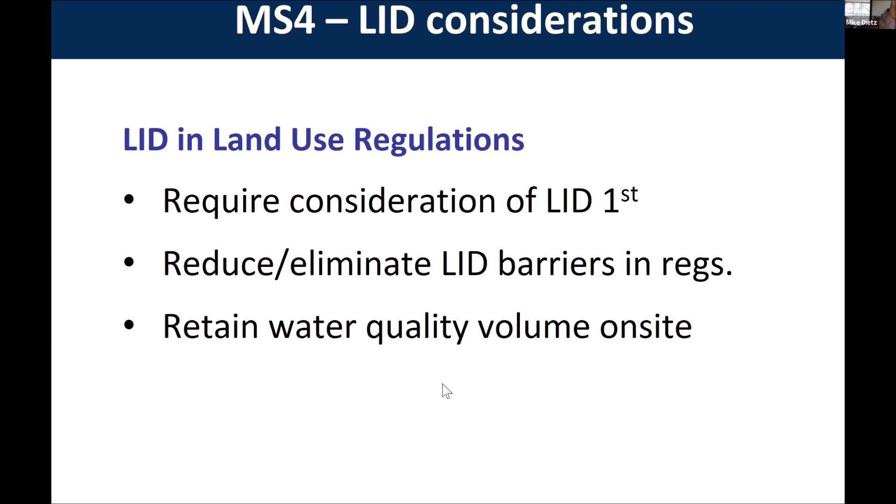And the last thing here, towns are now required to reduce directly connected impervious area by 1% starting this summer, July 1st. They did allow a 5-year look back so the towns can take credit for things that happened all the way back to 2012. So if you know there were any projects of things that I talked about tonight, that definitely can be used and counted towards your MS4 requirements.

So to wrap it up, how are we doing here on time? Pretty good, just under an hour. So that's what I find is kind of the limit with Zoom. Everybody starts to get a little squirrely after an hour of this.

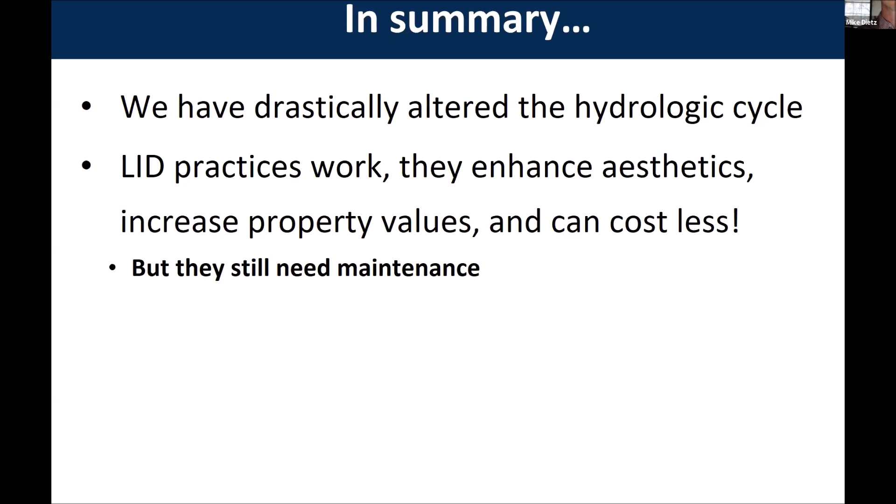So we've drastically altered the hydrologic cycle just by the nature of our developments. Low impact development practices definitely work. They enhance aesthetics, increase property values in some cases, and they can cost less. They don't always cost less, but they can in certain situations. They still need maintenance. I'm not trying to sugarcoat everything here for you. Many towns in the state have made regulation changes to encourage LID.

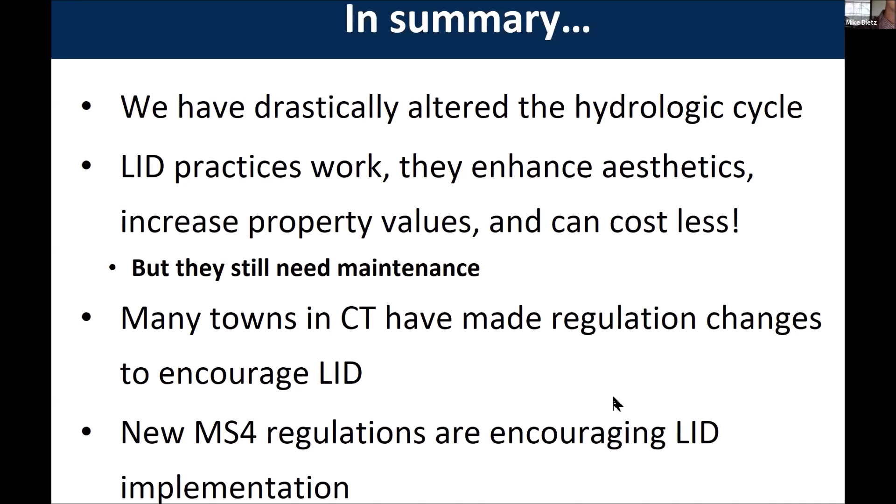And I'll find the link for that. We do have a page that has what's called a story map. So you can go through there and see what towns in the state have made these changes that are LID friendly. I should have had that link in here. I apologize. And lastly, the new MS4 regulations are encouraging LID implementation. So that's all I have for the formal part of the talk, and I'm happy to answer other questions you might have.

Mike? Yes. Yeah, I have a question. A couple years ago, I put in a rain garden because we put an addition on our house. I worked with engineering on this. And the actual installation was not horribly expensive, but the engineering, even for a residential rain garden, could be $3,000 to $4,000. That's a lot. Yeah, and I got a lower quote for less than that. But on your tool, would that potentially meet the requirements so a homeowner could potentially self-design it if they had some environmental background?

Definitely. Yeah, I guess it really just depends on what the town requires. So all the tools are in there in that website and in the app. You don't even really need an environmental background necessarily. I think if you can follow the instructions, the app and the website really do the calculations for you. So it's pretty straightforward. I think most people can probably do okay with it. And we're here as a resource too.

We have some recorded webinars where I go through in more detail talking about how to design and install rain gardens. So if you have folks in your town that are interested in that, I'm happy to direct them to some of our materials. Because it's a great idea to control runoff, and they can be relatively simple, but the design, when you get an engineer and PE involved, they definitely charge more than geologists do. Right. Yeah, for a residential one, in most cases, you don't really need an engineer.